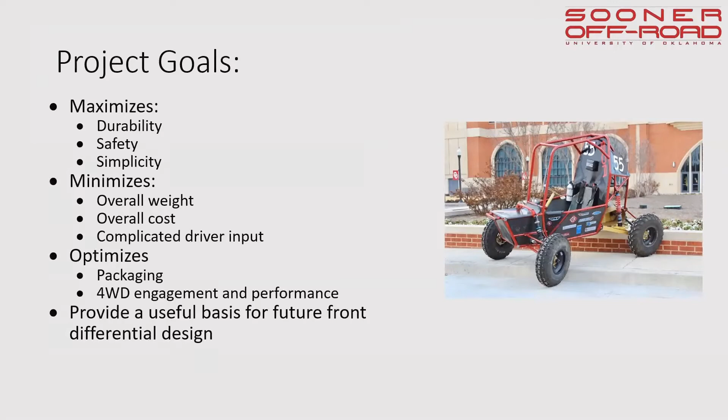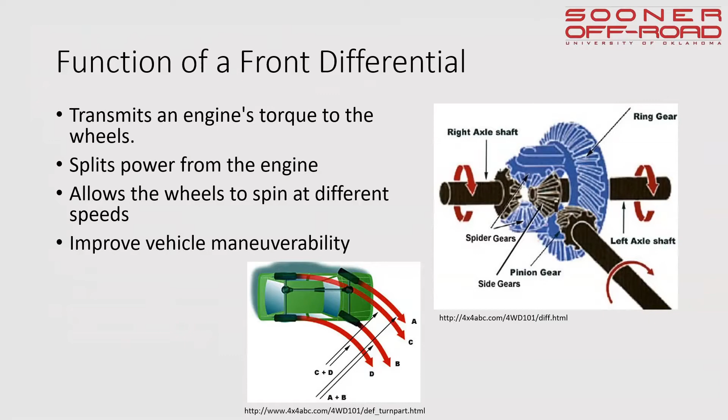So why do we think a custom differential will be better for our team? In the past, our custom built components have proven to be significantly lighter, and so there are some obvious weight benefits. In addition to lightweight components, we also have more control over where we place that weight in the components.

Likewise, we have some packaging benefits with a custom built differential. We can choose where we mount that differential and how we mount it. As I mentioned, we have some custom built components already, so a custom differential would directly integrate with the already custom built reduction gearbox that's in the rear of our vehicle currently. Overall, the custom differential allows for a lot more specificity and selectability in the performance specifications.

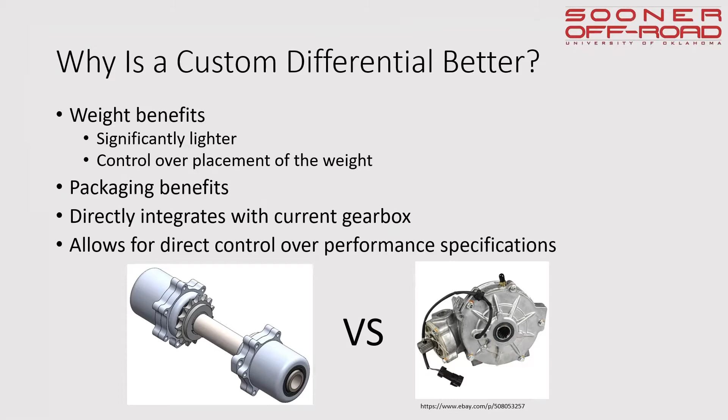Previously, the SAE sponsored competition that the Sooner Off-Road team competes in annually required that all vehicles ran a rear-wheel drive powered vehicle. However, in the upcoming competition, the rules mandate that all vehicles run a four-wheel drive, selectable four-wheel drive, or all-wheel drive vehicle.

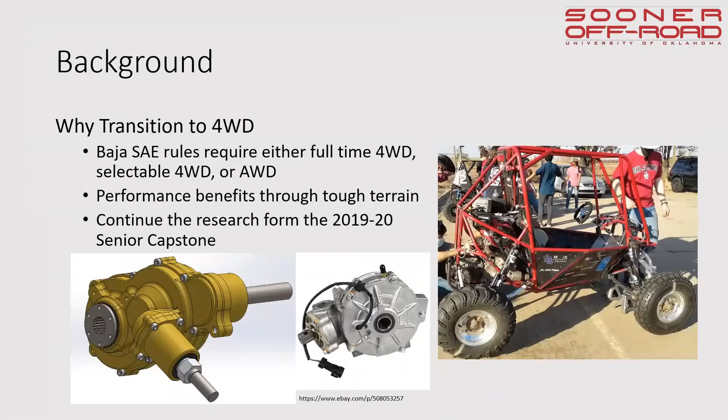Iteration 1, as you see here, was a direct result of that capstone project. It was abandoned early because of an insufficient power delivery method. Specifically, it utilized a prop shaft, which used two sets of bevel gears, one to two drive shafts, and two to four universal joints. We had issues packaging this prop shaft, and the selectability of the bevel joints was limited. It also required complex safety analysis to deem the whole system safe.

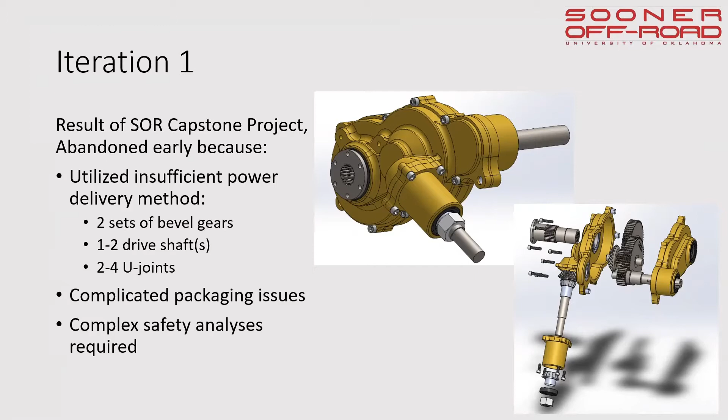Moving into what we had determined would be our second iteration and our current design today, we needed to collect some data analysis and data collection. Specifically, we needed to collect both the front and rear wheel speeds of the car through different types of turns, ranging from very sharp turns to large and sweeping turns.

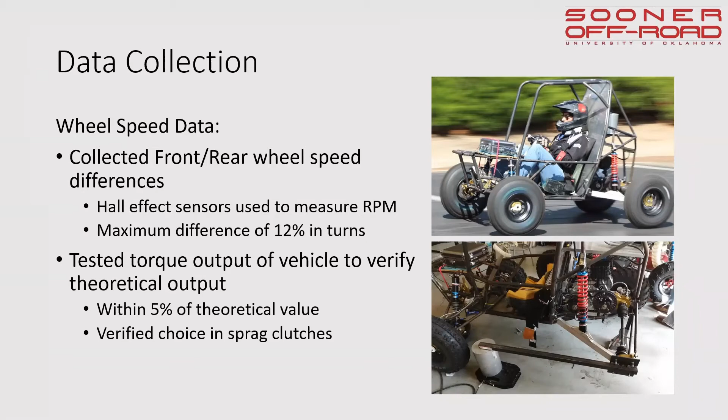As a result of this test and the analysis we had conducted, we noticed it is relatively close to our actual theoretical output and differs by only 5%. Overall, this allowed us to verify our choice in sprag clutches, as they carry a specific torque rating, and it allowed us to make sure nothing will actually break and it will be sufficiently strong.

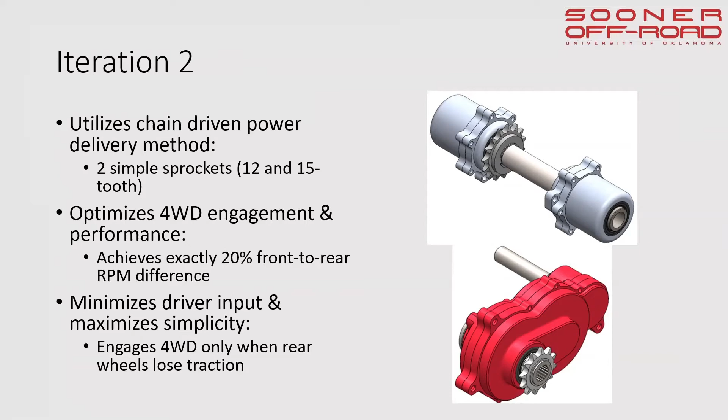This system uses both a 12 and 15 tooth sprocket to connect these two components, as well as achieve the overall difference in wheel speeds of 20% between the front and rear. This overall design allowed us to maximize the simplicity of the system, minimize driver input, and make the system automatic for when it engages four-wheel drive, minimizing the need for someone to participate to make sure the system works.

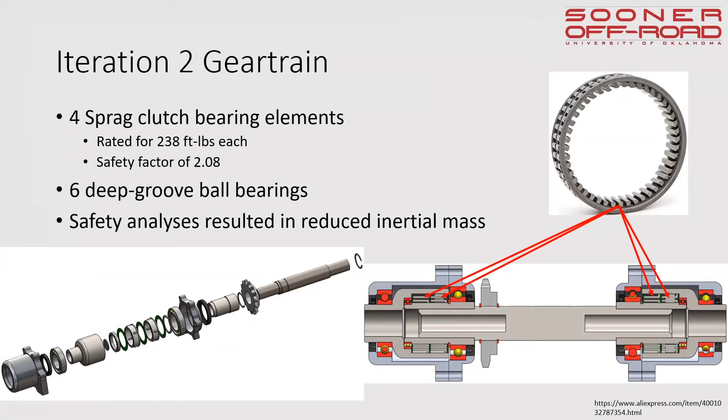In addition, this overall packaging allowed us to minimize the increase in center of gravity by keeping the engine relatively low in the car, as well as the gearbox in the back. Lastly, the overall design of this chain routing system allows for maximum durability, as the bottom side of the chain, which is responsible for power transfer, is relatively straight and has minimal bends throughout it.

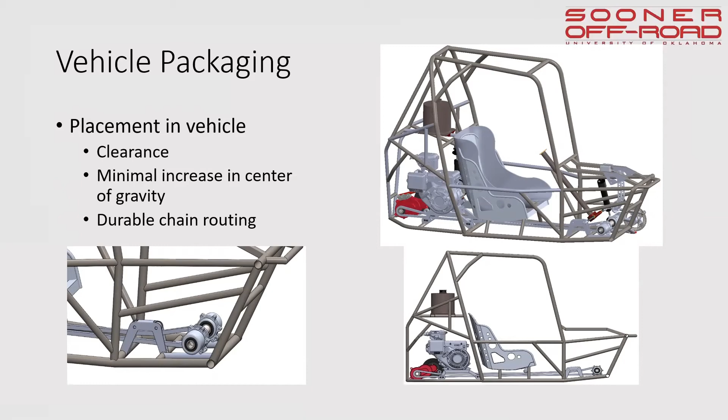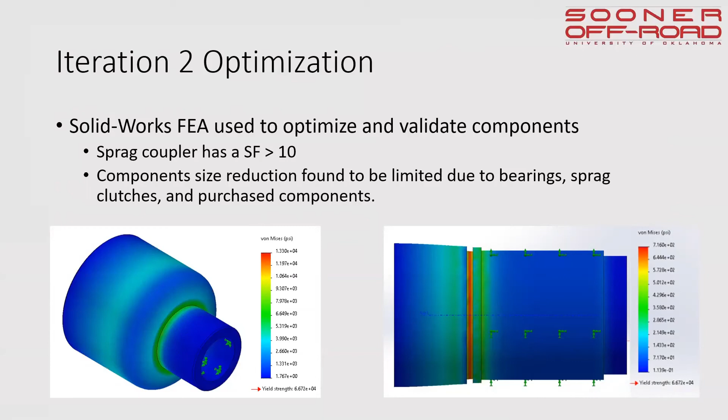In our specific design, we also did a large amount of SOLIDWORKS FEA to optimize and validate all the components which we had found. We determined that all of our components were extremely satisfactory in the actual application of our vehicle, as they all carried a safety factor of greater than 10. Furthermore, this allowed us to reduce any of the rotational mass of these components and make sure our power transfer method was as efficient and effective as possible.

So lastly, our overall design we justified through the fact that it is extremely simple and easy for us to manufacture here at the University of Oklahoma, and that this design is extremely reliable in the fact that if the chain system does fail, it will still function as a two-wheel drive vehicle. And lastly, a big advantage of the system was the fact that we have direct control over the engagement of the four-wheel drive through changing the front and rear sprockets to have a different gear ratio.

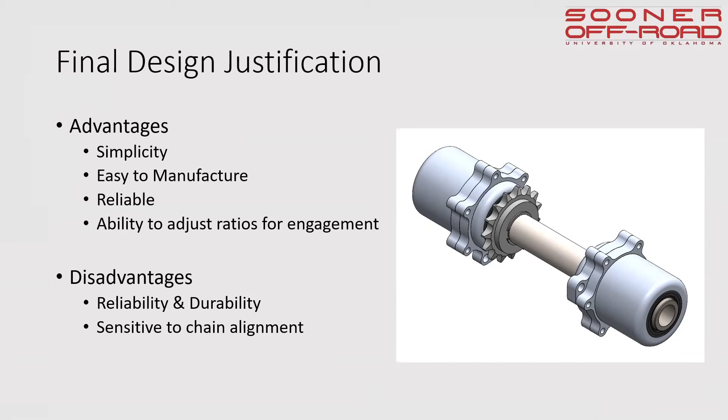Overall, the system did have a few downsides, particularly the fact that the reliability and durability of the system is completely dependent on the chain utilized in the system, and that it is extremely sensitive to the chain alignment.

As mentioned before, this project began where the senior capstone project left off, so there are some progress updates needed to better inform you of the status of this project. Our gear train is completely designed and all analyses have been performed, and the gear train has been deemed safe, so we are ready to begin manufacturing on all the shafts and bearing faces needed. Our mounting has also been finalized and we're ready to begin manufacturing for those parts. Overall, the design phase is 100% complete, and we currently have a scheduled design review with senior alumni or team alumni and senior team members.

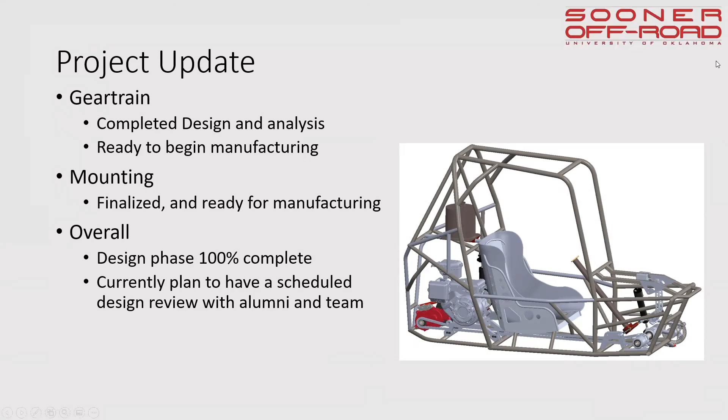However, this project is ongoing, so there are a few upcoming milestones we want to mention before we close off. There is a design review planned with senior members coming up this week. We also plan to begin manufacturing of the shafts and bearing faces this week. Following the successful manufacture of all the components, we will assemble those components to test the fitment. And following successful fitment, we plan to test and validate the durability and engagement of our sprag clutch design in a controlled scenario.